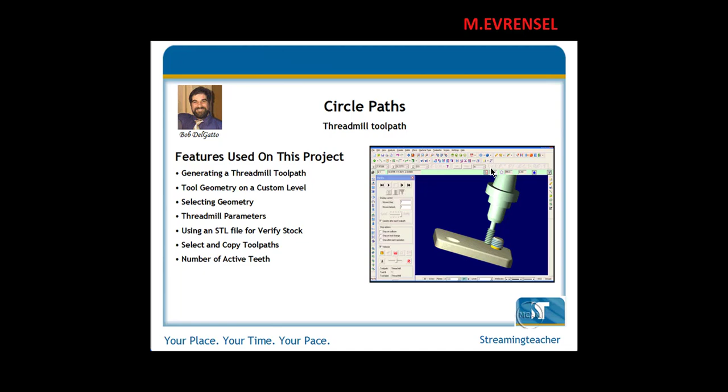This file is going to focus on creating a Threadmill toolpath. Now to access thread milling, we can go over here to our toolbar and click on this icon right over here, or from your toolpath button, come down to circle paths, over and down to Threadmill.

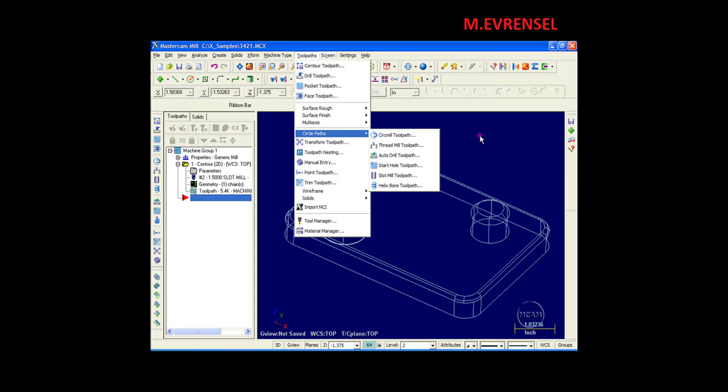But before we get started creating a toolpath, I'd like you to take a look and see what is included with this file. I'm going to open up my Levels Manager, Alt-Z, turn on my wireframe. Currently all that's on the screen is a solid. Right-click Dynamic Rotation, pick right over here, and I can move this around.

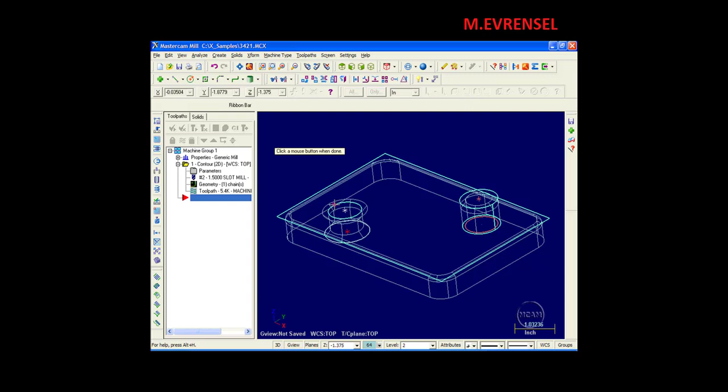Now, in addition to the solid, you'll see a few circles, points, and a rectangle. That wireframe geometry is what was used to create the solid. And as far as creating our Threadmill toolpaths, all we really need are the points. The red circle right in over here is used in the toolpath that comes with this file.

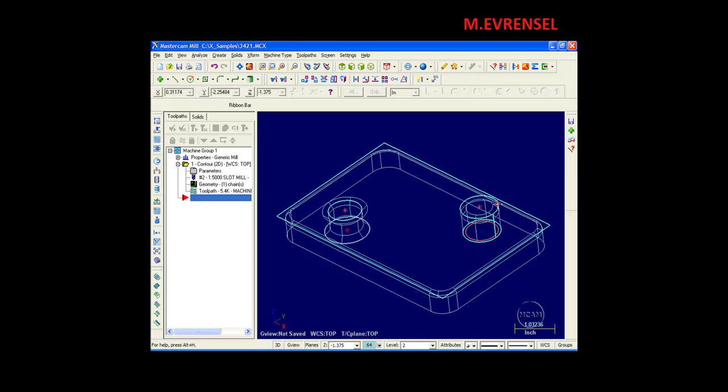And this is a contour with a slot mill that's going to come right around this standoff and cut a thread relief before we cut our threads on it. We're going to take a look at creating both an internal Threadmill toolpath and an external Threadmill toolpath.

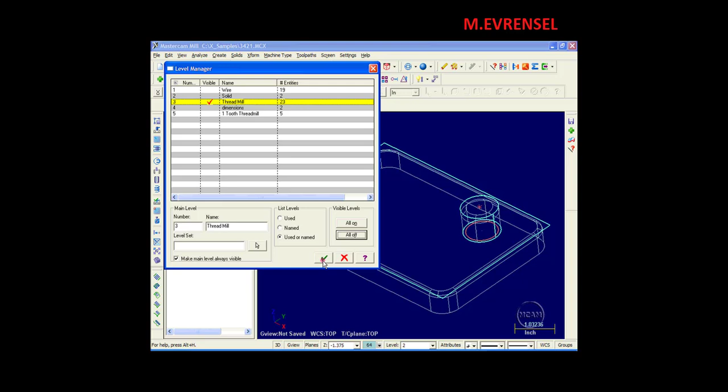The next thing I'd like you to look at, Alt-Z again, turn on Level 3 and all off for the rest. Now this should stay checked and highlighted yellow as long as you have this box checked. Click this off, go to Top View, Alt F1, Fit to Screen. Now what you're seeing here is my custom tool that I drew on Level 3. F9 gives me my axes indicator,

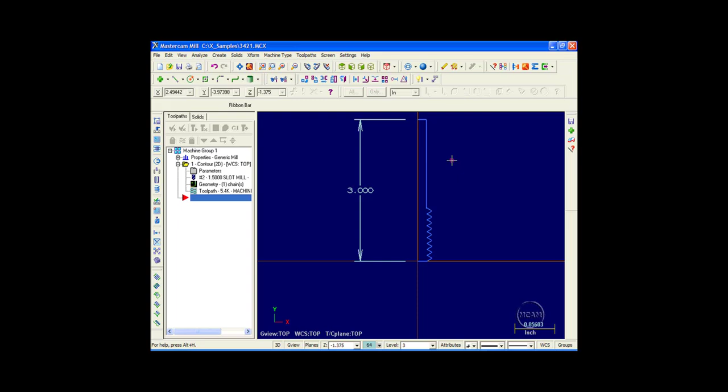X-axis, Y-axis, and what I've drawn here is an 8 threads per inch thread mill. I have 9 active teeth, and the pitch, the distance from one tooth to the next, is 1/8 of an inch. Now the way this is drawn, the bottom and center line of my tool starts at our origin, and I extended it up as high as I'd like it to be.

I do not connect these two endpoints together. I leave this as an open chain. So this is a multi-tooth thread mill. Alt-Z again. I could turn on dimensions and you could see my pitch. Here's my distance for active teeth, my overall length.

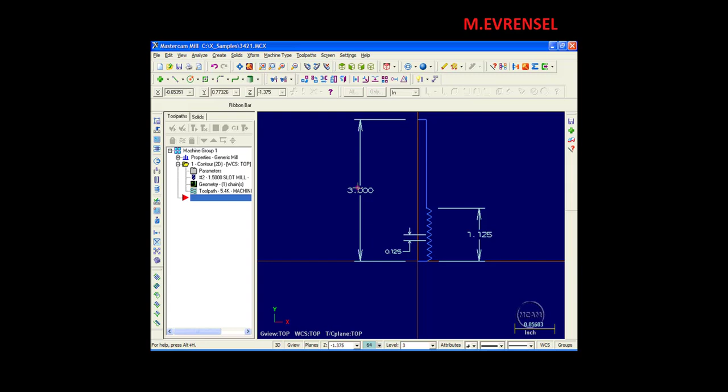Alt-Z again. Now I'm going to turn on Level 5 and turn these off. And what I have here is kind of like a boring bar, but it is shaped at my 60-degree angle. This can be used in a thread mill operation, but it only has one active tooth. If you don't have an actual thread mill, you can get away with using a boring bar that you've ground into the proper shape.

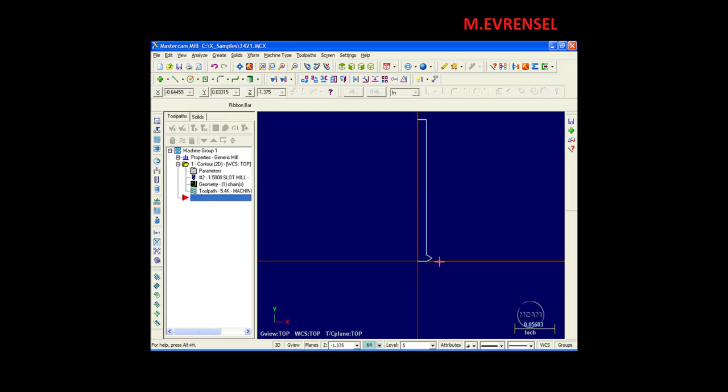Now what you're also going to find when I go to create these toolpaths, I have created undefined tools and I have pointed to the levels that I've drawn this geometry on. So my tool shape definitions are coming from these drawings. So we'll do 2 sets of toolpaths, one with the 9-tooth thread mill and one set of toolpaths with the single tooth thread mill. Let's go ahead and turn our wireframe back on.

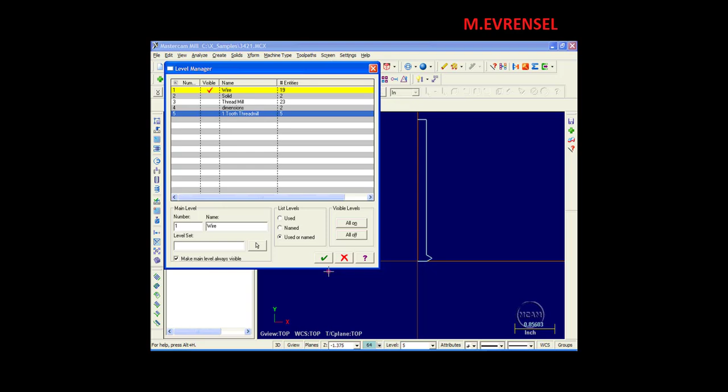I'll turn this off. Also turn our solid back on so you can see it. Alt-7 gives us our isometric view. Let's go ahead and activate our Threadmill toolpath. This opens the same dialog box as for drilling operations, where we can pick entities, which would be our circles, or we can pick points.

The first thing I'd like to do is pick the top point right over here, and we'll do our external thread first. I'll say OK, and I have our first tool. What I'm going to do is enter this by right-clicking and edit the tool, to show you what I have. Now with this tool, I have it pointing to custom level 3, so that's where the geometry for this multi-tooth thread mill is residing.

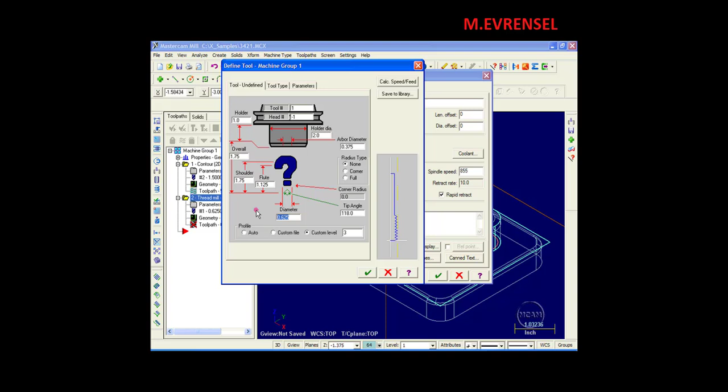I've specified the diameter so that it matches the geometry that I drew, and the value of this diameter is represented by this yellow vertical line right here. If I change this to 1 inch, look at what happens. And this is the value that Mastercam is going to be calculating the toolpath with. And if it doesn't match up with your geometry that you drew, you're not going to get satisfactory results.

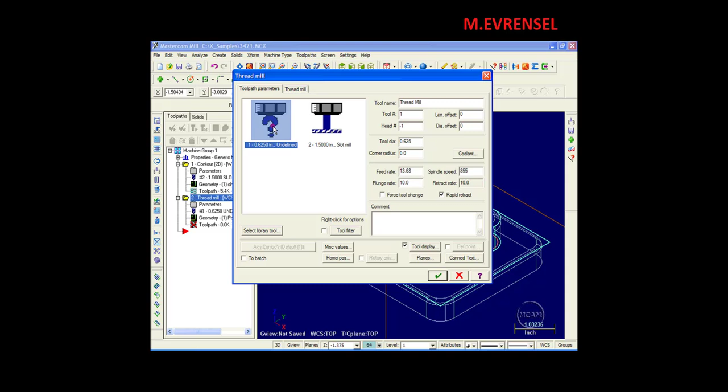I'll say OK. Now this is the tool that's selected. I can set my spindle speeds and feed rates. I can also come back here in the toolpath parameters and I could specify my feed rates that I would like to see happen. Let's move on to our Threadmill page. Number of active teeth.

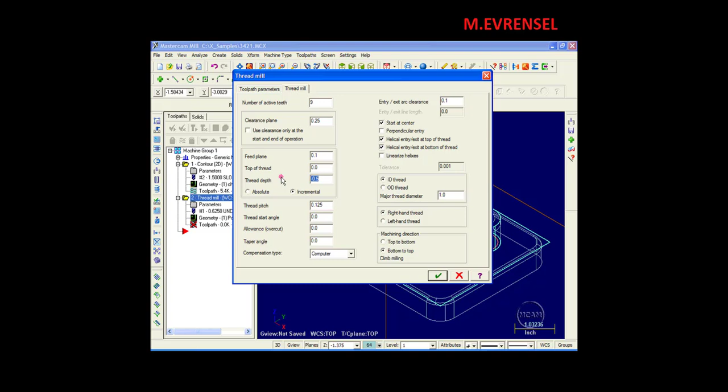Now in this tool we have 9 active teeth. We can set our clearance plane. Where do I want to rapid down to? I'll leave this at 1/4 of an inch. My feed plane, this will be fine. Top of thread is at 0. My thread depth is actually from the top up here down to this bottom circle is minus 750 thousandths.

Well, I'm going to be cutting a thread relief in here, so I don't want to take any chances of the tip of my tool touching the top of this surface. So I'm going to set this for minus 0.745. In this tool path, it can either be absolute or incremental. Since our point resides at 0 on the Cartesian coordinate system, the values would be the same.

My thread pitch is 1/8 of an inch. Thread start angle is 0. Allowance: this allows you to increase or decrease the cut of your thread. Taper angle, if you're doing pipe threads, for example. Compensation type, whether you want it in computer, control, wear, reverse wear, or off. Entry, exit, arc clearances. Do you want to start at the center?

Perpendicular entry, helical entry and exit at the top of the thread, helical entry, exit at the bottom of the thread. Linearize helixes. If you have a machine that cannot execute helical moves, if you check this, it will create line segments within the tolerance that you specify here. Creates a very large code. If you have a machine that's able to execute helixes, then leave this unchecked.

This is an OD thread. Our minor diameter is 0.865. It's a right-hand thread. We're going to go from top to bottom, performing a climb milling operation. I'll say OK. We'll activate backplot. Move this around a little bit, and let's take a peek.

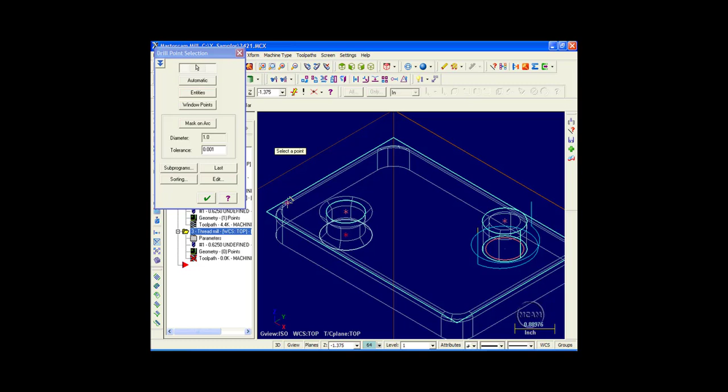Okay, let's go ahead and do our internal thread now. I'll activate our thread mill. I'm going to select our top point, click OK. I'm going to use the same tool. Go to my thread milling parameter pages, 9 active teeth, clearance plane is fine, feed plane, that's okay. My top of thread in actuality starts at negative 0.750. My thread depth, if I go absolute, is going to be minus 1.375.

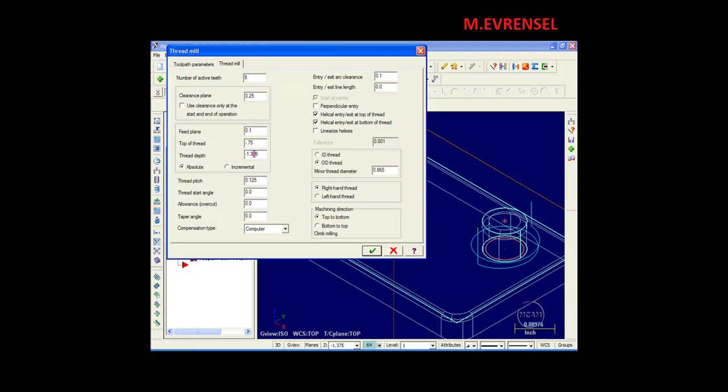Now, since this is a through hole, and I'm going to assume that I have clearances underneath, I'm going to increase this a little bit more just to give myself a little bit of latitude. So I'm going to give it 1 extra thread depth. So we'll put it at negative 1.5 inches. This is absolute. Now, if this was incremental, I would change this to where it would be a distance from the point that I chose, which would be negative 0.750. So I can go either way. So absolute, I'm going to leave it at negative 1.5.

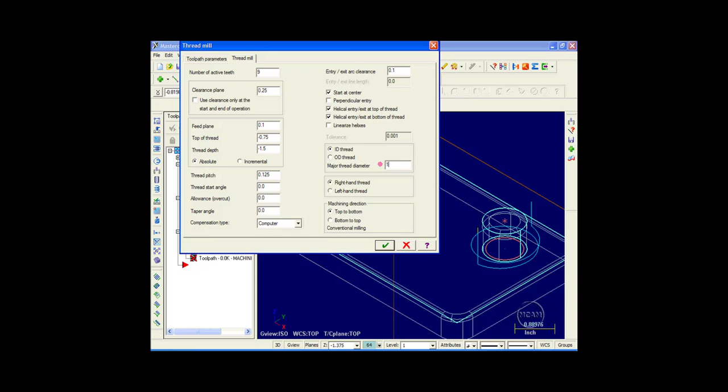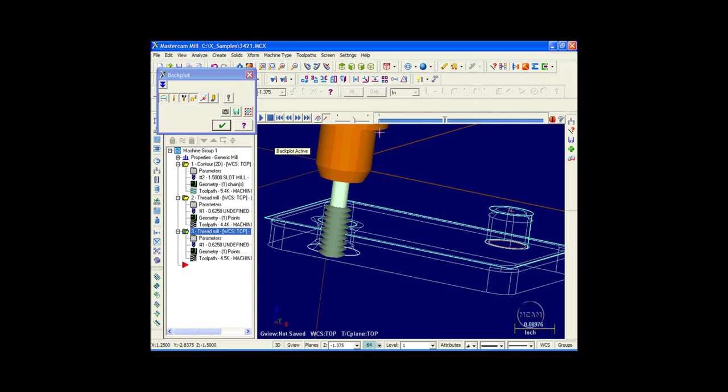Thread pitch is the same. Start angle, allowance, and so on is all the same. It's an ID thread. My major diameter on this one is 1 inch. It's a right-hand thread. And if I do a machining direction of top to bottom, that's conventional milling. If I have it enter the hole and go from bottom to top, that becomes climb milling. And this would be the preferred method that I would use. I'll click OK. We'll go to backplot. Our tool comes down and helixes up and then out.

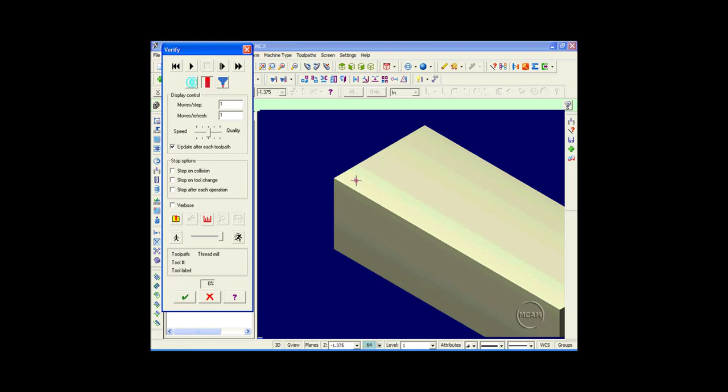Now, if you would like to see this whole operation, let's go to verify, and I'll show you what you can do. We'll select the machine group. I'm going to go to my isometric view. Let's enter verify. Since we haven't machined all of the rest of this part, what I've done is supplied you with an STL file so you can bring in a pre-shaped part.

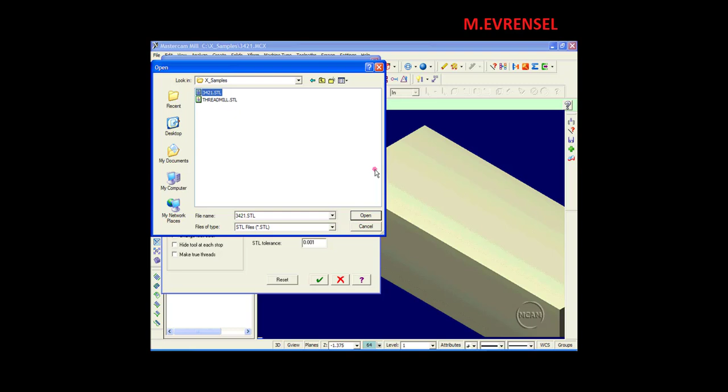So let's go into our configure page. We're going to switch our stock from box to file. Now, along with this file, one of the files that you were able to download would have been 3421.stl. So wherever you have saved that, go find it and highlight it, say open. Let's set our tool tolerances to 1,000th and our STL tolerances to 1,000th. Check on change tool color and we'll click OK.

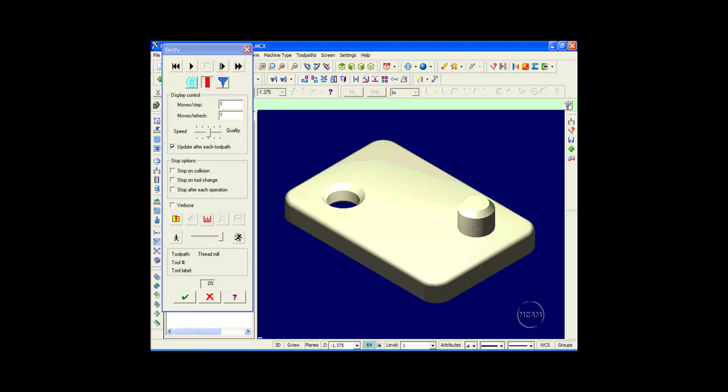And what you'll have now for your stock is a solid representation of the part prior to threading. Now, the first operation is going to be a slot mill that's going to come right around here and machine in a thread relief. So let's take a look at this. We're going to increase the quality. We're going to slow this down. I'll even have it show the tool holder. And let's go ahead and let it cut.

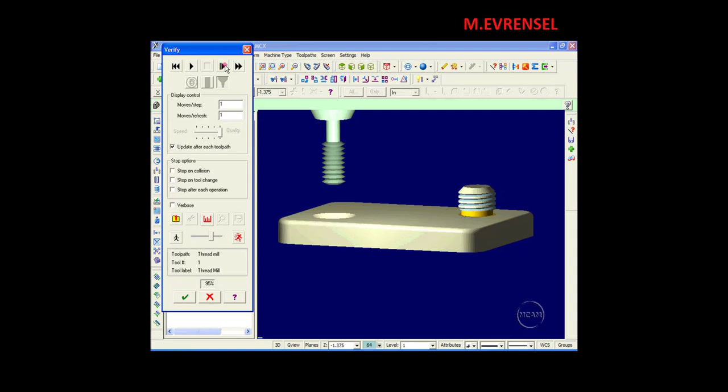Now there is our slot. And we'll stop right here. And you can see how it helixes down and comes out. Our next operation, we'll move over, down, this out, helix around, and exit our part. And you can see with the pre-cut chamfers and everything how it just funnels right on into our part. And we have our threads cut in.

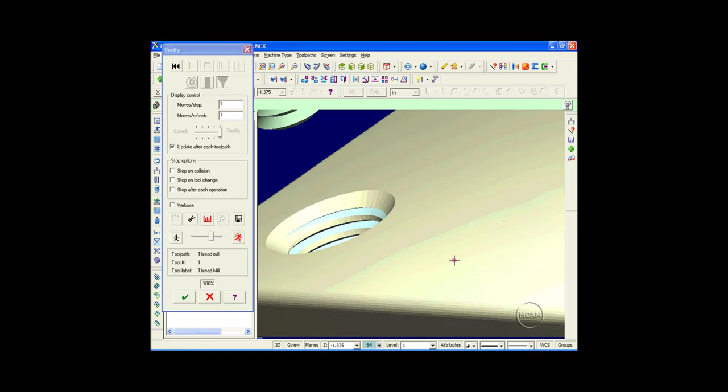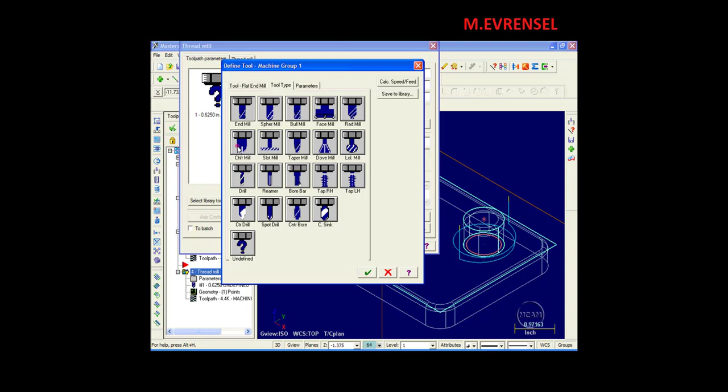Now let's do the same tool paths with our single tooth thread mill. So I'm going to right click on this, drag it down, release, tell it to copy after, go into my parameters, go to the front page of it, right click, create a new tool, undefined. My custom level is going to be level 5. Now you can see the outline of my single tooth thread mill, 0.625. I'll say OK.

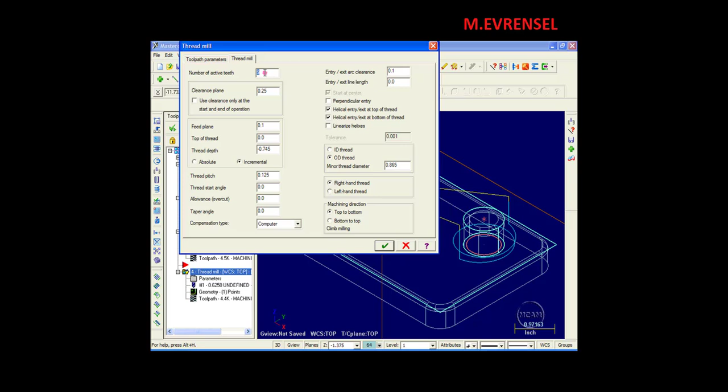Go to my thread mill parameters. Now for my number of active teeth, instead of 9 I'm going to say 1. Okay, this is an OD thread. Everything else stays the same. I'll accept it, regenerate it. Let's go ahead and go into backplot. And what you'll see now is our tool comes down and it helixes down as many times necessary to get the amount of thread that we need with only a single active cutting tooth.

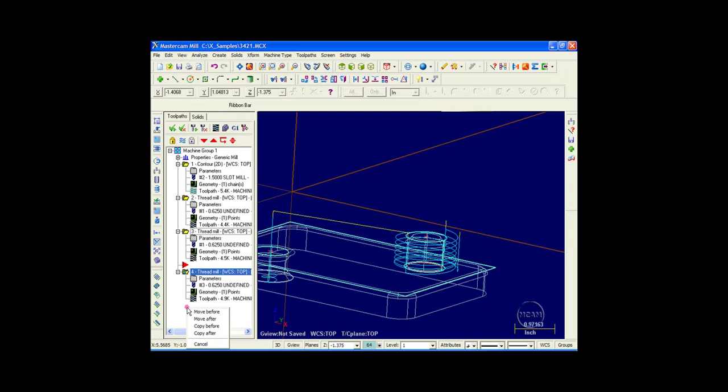Now we can do the same thing for our internal thread as well. I'll right click, drag that one down, copy after. We'll go into our parameters, go to our front page, and we will select our tool number 3. Go to Threadmill, and now instead of 9 active teeth we have 1. Everything else is the same. I'll accept it and regenerate it.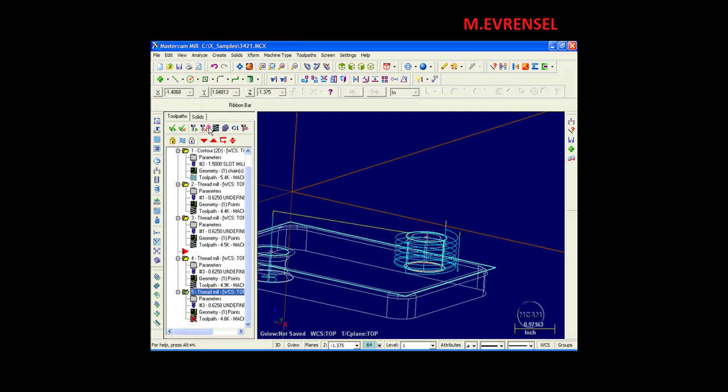And with this tool, it'll enter down in the bottom and then work its way up. And it will helix as many times as necessary to give us the amount of thread that we want with only 1 active tooth.

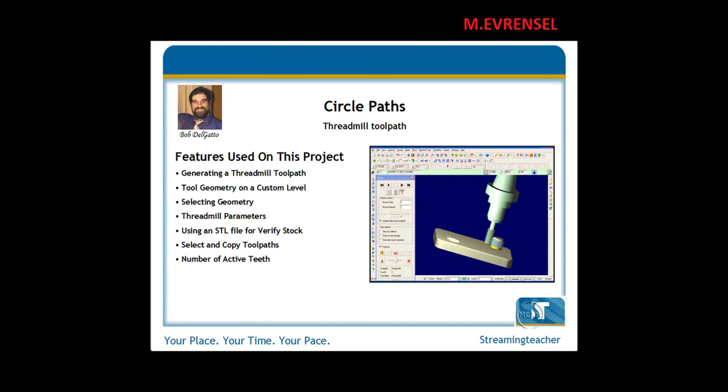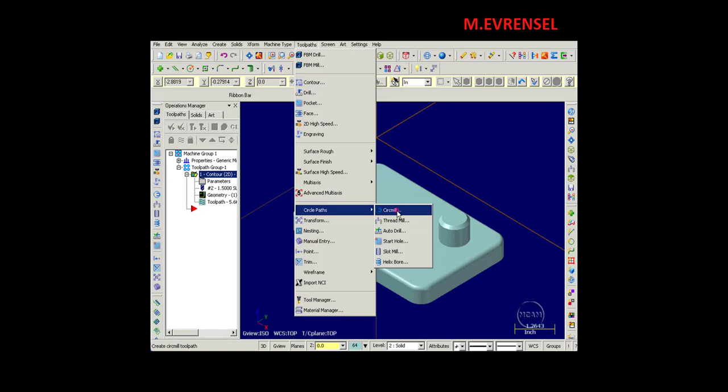In this video we're going to take a look at thread milling. Now thread milling is another toolpath within the circle mill family of toolpaths, and to access it you can get to it from the toolbar right up over here. You can go up into your main menu bar and under toolpaths, down to circle paths, over and down to thread mill. I could also right click in my operations manager, mill toolpaths, drop down to circle toolpaths, over to thread mill. Now before we get into doing that, I want to take a quick look at what is included in this file.

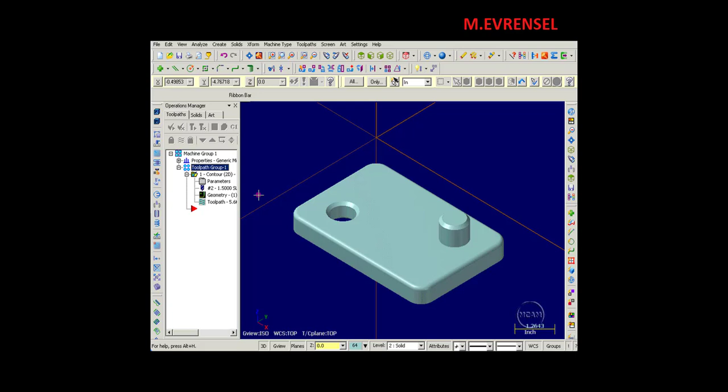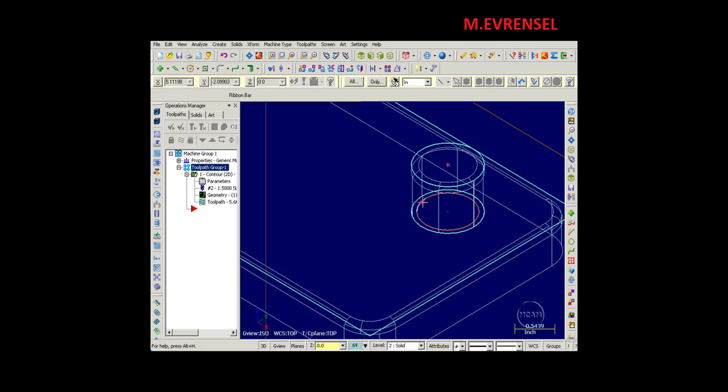Alt-Z opens up my levels manager, and currently level number 2 is my main level. I'm going to make level 1 visible. Click OK. Alt-S unshades my part. So there's the solid part that's on there, and then you'll see some wireframe. Now the wireframe for the most part is what was used to create the solid. There's a couple other elements up there though. I've got some points which I'm going to utilize to create the tool paths, and then this inner circle right here is being used in a tool path which is already created for a slitting saw to undercut this boss that's sticking up to act as a thread relief.

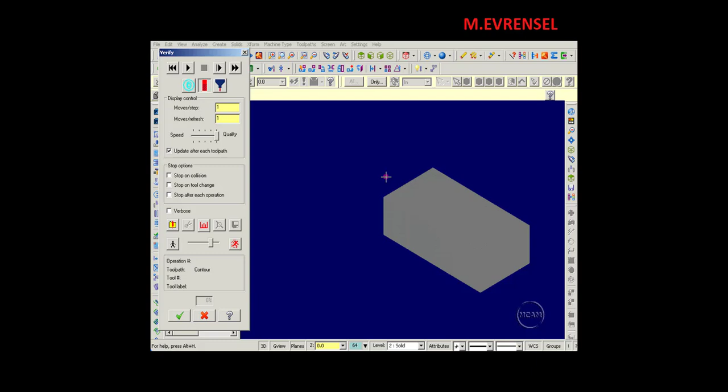So let's go ahead and take a look at this tool path and verify. Go into verify. Now I'm just getting a block of material here. What I want to do is I'm going to use the solid that's on the screen. So I'm going to go into my options. For my stock shape I'm going to select solid and click on my selection button. Alt-S shades my part. I'm going to come over here and I'm going to select my solid. Click OK. And now I've got my solid part representing the stock.

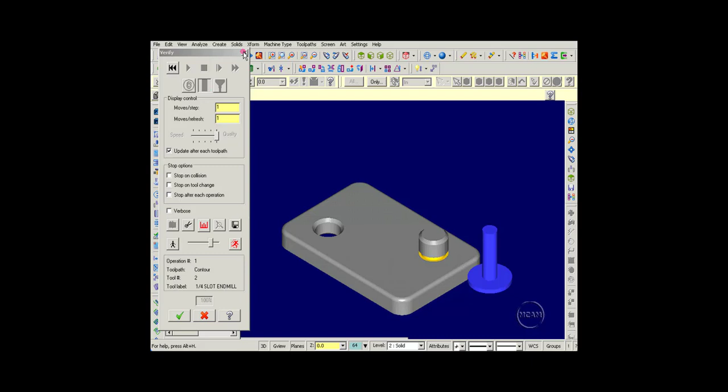Keep my quality up, turn the speed down a little bit, and let's go ahead and machine this. And you'll see a slitting saw come in and undercut the post that's sticking up, and this will be my thread relief. Isometric view, exit. I'm going to go back into my levels manager, Alt-Z. I'm going to make level 3 my main level and turn off the visibility on level 2 and level 1. Click OK. Alt-1 is my top view.

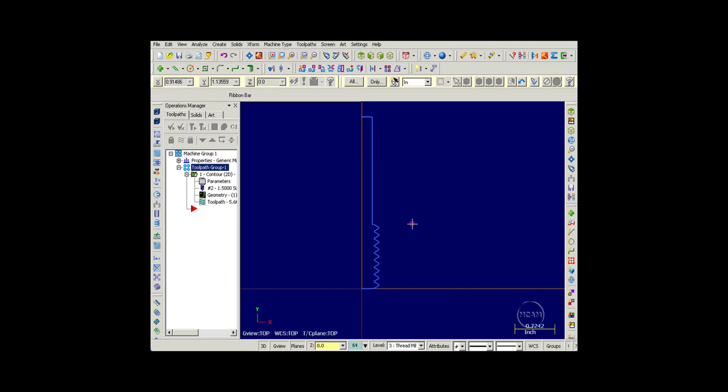Now what's residing on level 3 is the geometry that is going to define my thread milling tool. Alt-C. I'm going to go back to level 2 as my main level, turn off the visibility of level 3, turn my visibility of level 1 back on. Alt-7, isometric view. Alt-S turns the shading off.

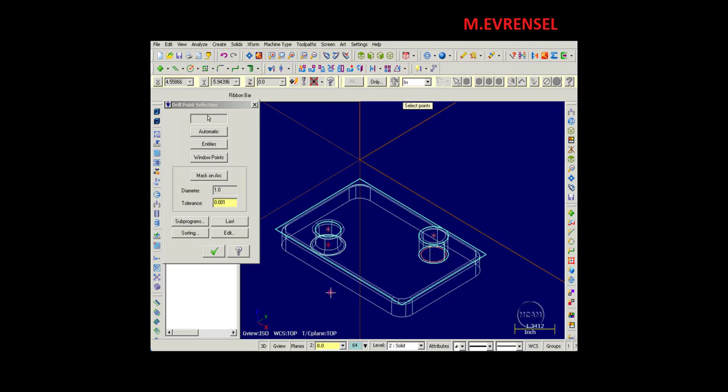I'm going to right-click in my Operations Manager, Mill Toolpaths, Circle Toolpaths, Threadmill. I'm going to zoom in, and I'm going to select this point. Click OK. If my operation is thread milling, I'm going to go to my tool page. I'm going to go into the white area of the window, right-click, and create new tool. Select Undefined, and for the profile, I'm going to toggle on Custom Level and type in Level 3, hit Enter.

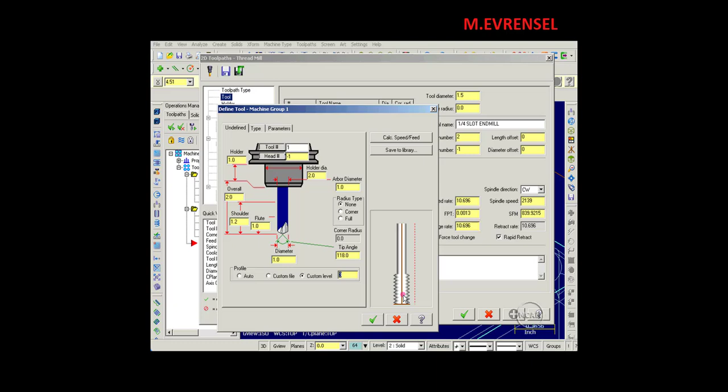Now you're going to see the profile representation of the geometry that is on Level 3. This dotted line right here is how the system is going to compensate for the diameter of the tool. It's defaulting to 1 inch, that's not what's drawn on there. What's actually drawn on there would represent a 0.625 diameter tool. And now you see this dotted line move to the edge of the tool.

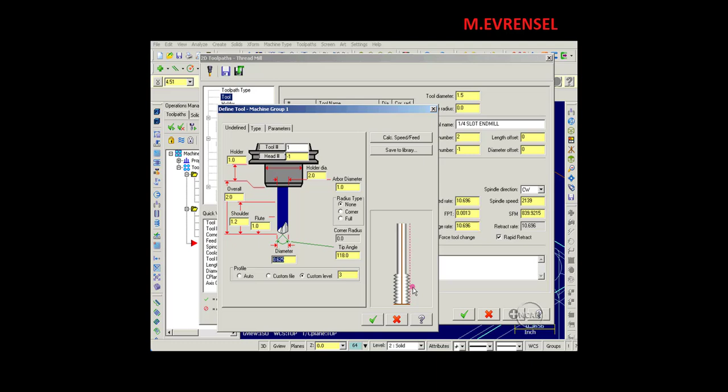Now the other thing that I'm going to do is go to my parameters page on this, and for the tool name I'm going to type in Threadmill. Spindle speed I'm going to select 1200 RPM. Retract rate, let's do 15 inches a minute. Plunge rate, let's do 12 inches a minute. And feed rate, let's put it in at 25 inches a minute. And click OK. Go to our cut parameters.

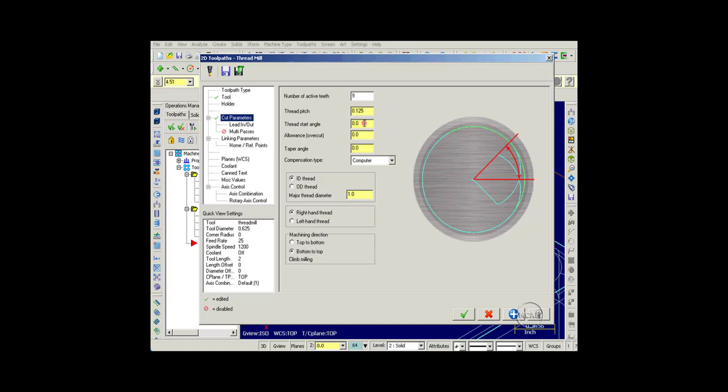Now the tool itself has 9 active teeth on it. My pitch is 0.125, so I can leave that where it's at. My thread starting angle, if I wanted to orient the beginning lead of this thread, I can define it here. I don't need to do that on this part. My allowance, this can give me the ability to adjust the size of the thread itself, depending upon whether it's an internal or external thread. Taper angle, if we were doing a pipe thread.

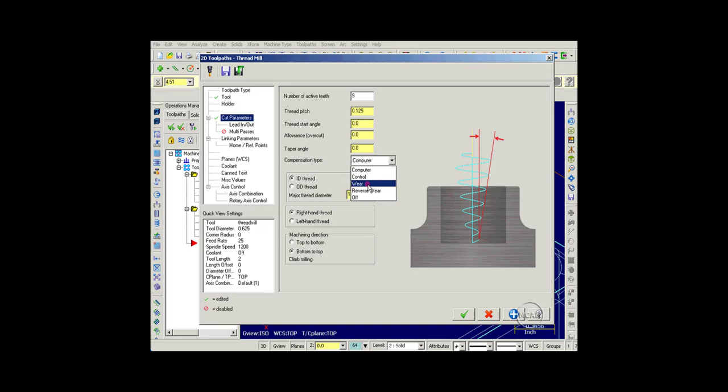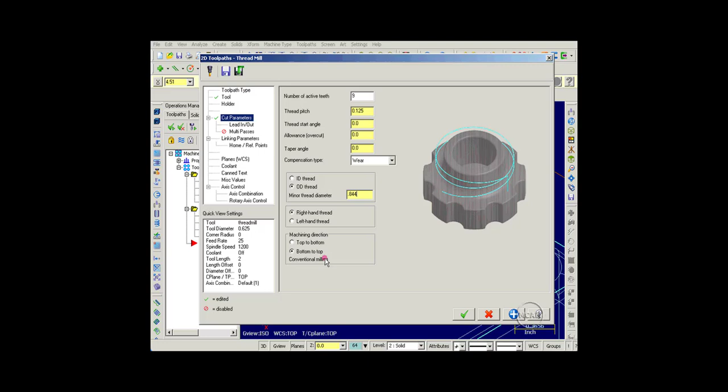Compensation type, computer, control, wear. I'm going to go ahead and select wear. Is this an ID thread or an OD thread? Okay, well, it's outside diameter. I need to tell it what the minor diameter is. On a 1"-8 thread, my minor diameter is 0.844. Right or left-hand thread? Well, this is a right-hand thread, and I want to climb mill it, so I'm going to go from top to bottom.

Continue to lead in, lead out. External thread, I've got plenty of room. I'm going to do 150 thousandths on that. I don't want to start at the center. I'm going to give it an extra line length, say 50 thousandths. I'll need that straight line move so that it could turn cutter comp on. Perpendicular entry, I don't need that. Helical entry at the top of threads, yes. At the bottom of the threads for the exit, yes.

Linearize helixes. This you would toggle on if you were dealing with a machine that couldn't process helical moves. By toggling this, you can define a tolerance and it'll start to create a whole series of linear moves for that type of machine to process. I can access multipass. I'll activate it. Let's give it 3 roughing passes of 0.035, 1 finish pass, and we'll make that 8 thousandths. I can specify spring passes if I desired. I can override the feed rate.

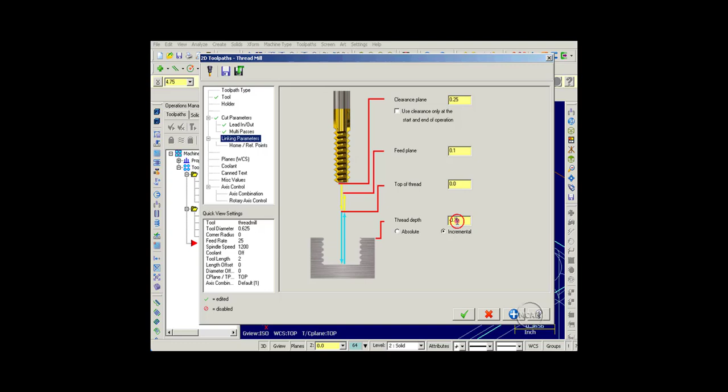My linking parameters. I'm going to right-click in this field for my thread depth, Z coordinate of a point. Brings me out to my graphics area, and I'm going to select the center of this arc. Now you see it automatically inputs a depth of -0.750. Now I don't want to take a chance of the tip of the tool touching the top face of my part. So I'm going to shorten this up just a little bit. I'm going to make it like 0.745.

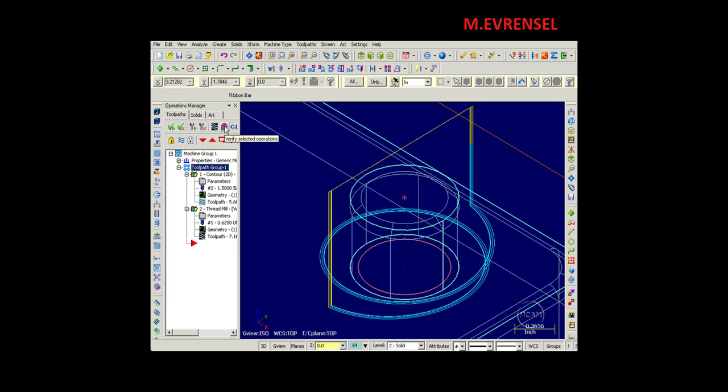The top of the thread is at 0. Feed plane, 100 thousandths above that. Clearance plane, let's make this 1/2 inch. I can turn on coolant and so on. I'm going to go ahead and accept this. I'm going to select both my operations and go into verify. We'll have it machine the thread relief and now the thread milling. And it's taking its multiple passes, getting deeper each time.

Right click, dynamic rotation. I'm going to pick the center of this and move it around. You'll see I've got the threads cut.

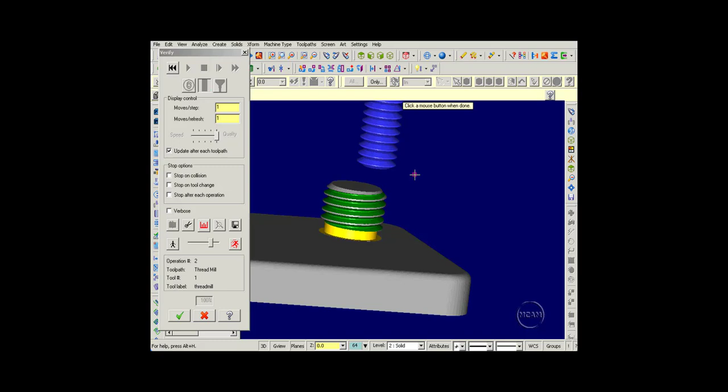Now we're going to create the internal Threadmill toolpath. Now I'm going to make sure that my second operation is the only one that is checked. I'm going to right-click, drag, release, copy after. Now I'm going to need to switch points because both of these operations are being generated by this point here.

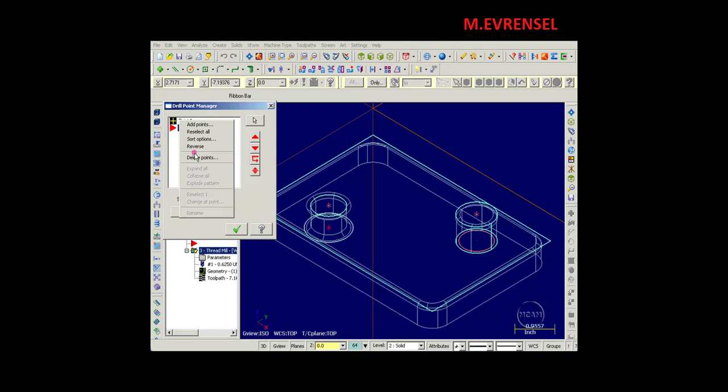Left-click on the geometry portion of my operation, and that'll bring me to my drill point manager. Right-click on the point in my manager, delete point, come to my graphics area and pick the point to delete. In the manager, right-click again, add a point, come to the graphics area. I'm going to select this point now, click OK, and click OK. Now let's go back into our parameters.

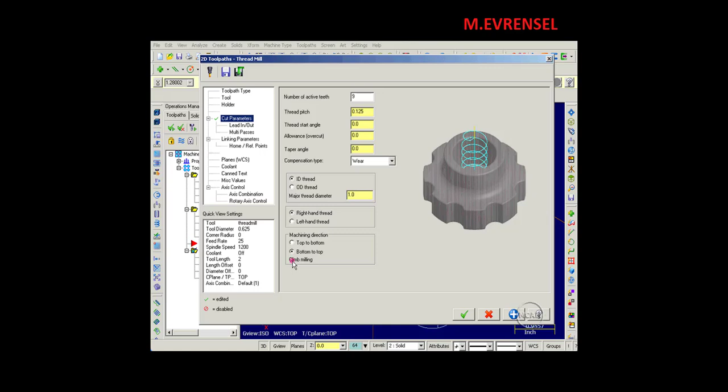My cutting tool is going to be the same. For the cut parameters, same information on top, with the exception that we're going for an ID thread now. And this will have a major diameter of 1 inch. Still a right-handed thread. I'm going to go from bottom to top so that it's climb milling. For the lead in, lead out, I'm going to get a little more conservative and change this to 100 thousandths.

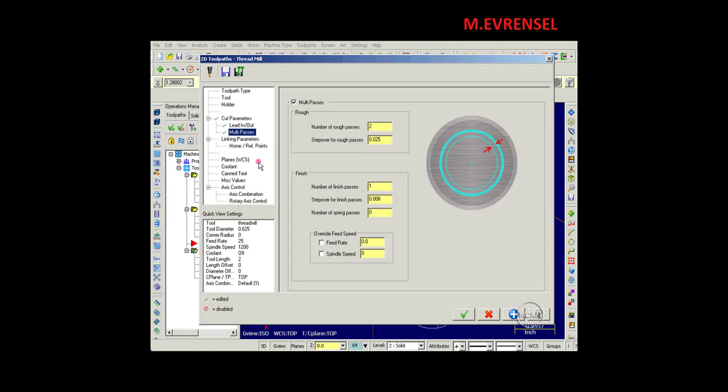Straight line, let's make this about 20 thousandths because I'll need that if I'm using cutter comp. Multi-passes, make this 2 at 25 thousandths. And we'll leave the finish pass the same. The linking parameters. Okay, I'm going to switch over to absolute.

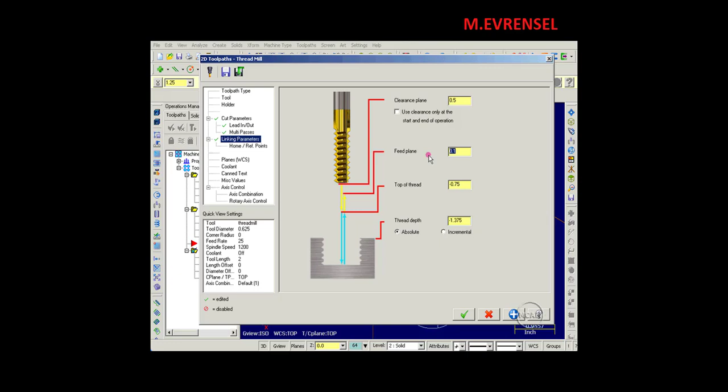Right-click, z-coordinate of a point, and I'm going to pick that point. Right-click in the top of thread field, z-coordinate of a point, pick this point. For my feed plane, I'm just going to type in a negative 0.5. And my clearance plane, I'll leave that as it stands. Click OK and regenerate. Now I'm going to go ahead and verify all of these.

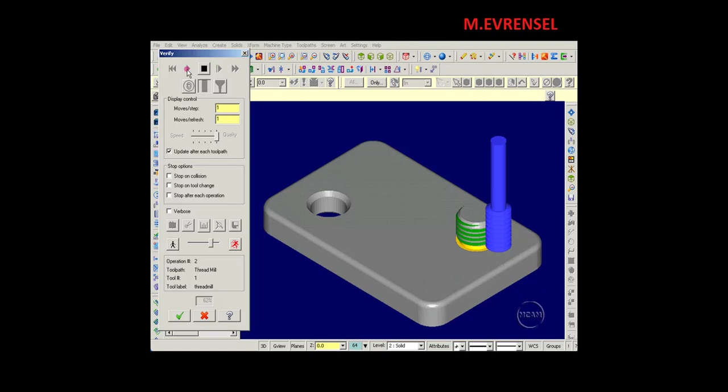Click on my toolpath group, go to verify, and let's see what we got. Does the undercut. Mills the threads on the outside. Should be the finish pass. Comes inside. And there we go. Now just to take a look at this, I'm going to go ahead and split my verify results. I'm going to click on this button.

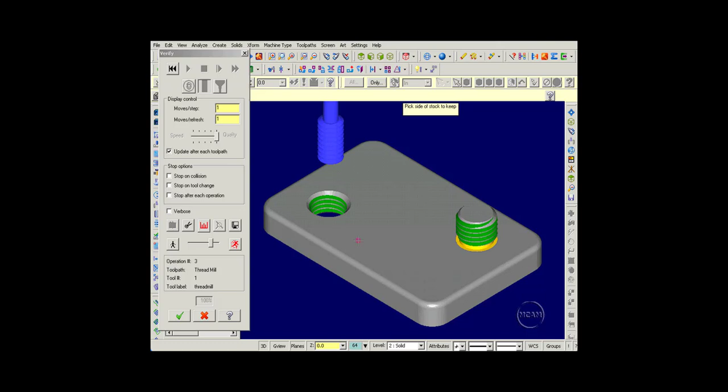I'm going to pick a spot that will act as a dividing line. I'm going to pick right over here and then come back behind it and select which side I want to keep. I could either be on this side or this side. I'm going to pick this. I'm going to right-click, dynamic rotation. I'm going to catch the center point of this circle and then just spin it around. And you'll see that we have internal threads now.

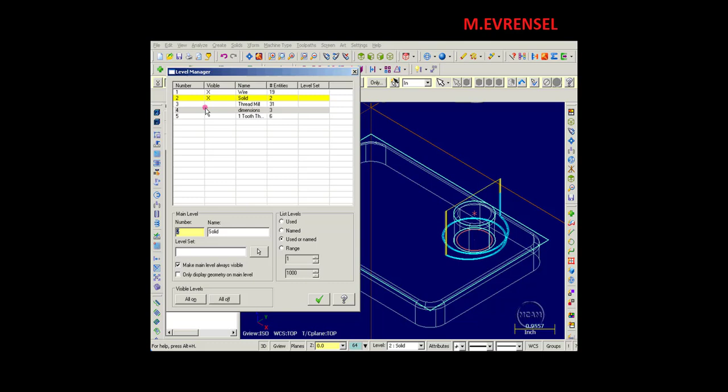I'm going to exit, Alt-7, isometric view, Alt-Z opens up my levels manager. Now on level 5, I'm going to turn off my toolpath visibility. Alt-1, top view. On level 5, I have the profile of another tool drawn.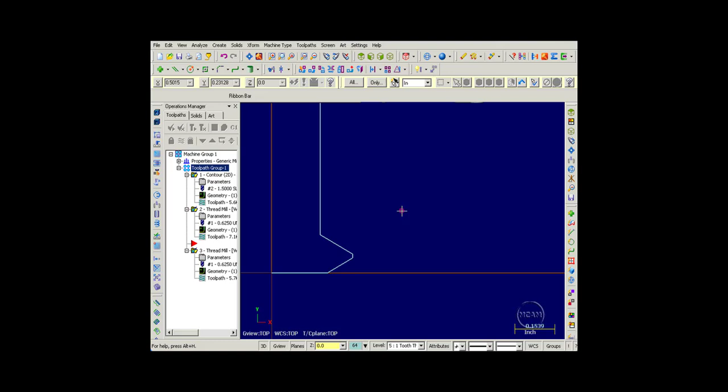Now this would be in the instance where you don't have a thread mill, but you've got a boring bar that you could regrind. And you can grind in your 60-degree included angle, put the flat at the tip of it, and draw it out. And you could thread mill using this. The only difference between the thread milling tool that I was using in these operations and what this would do is the number of active teeth. The previous one had 9 active teeth. This one only has 1.

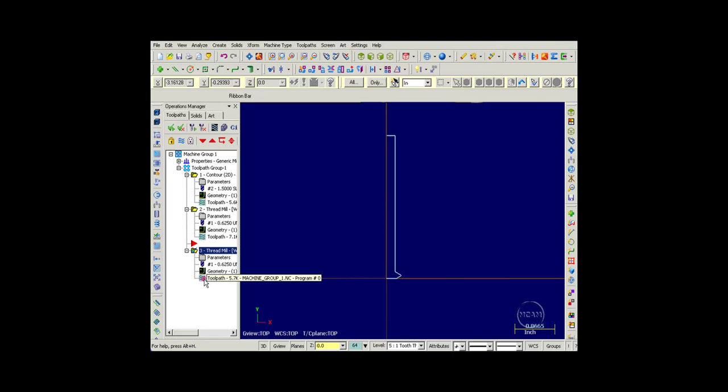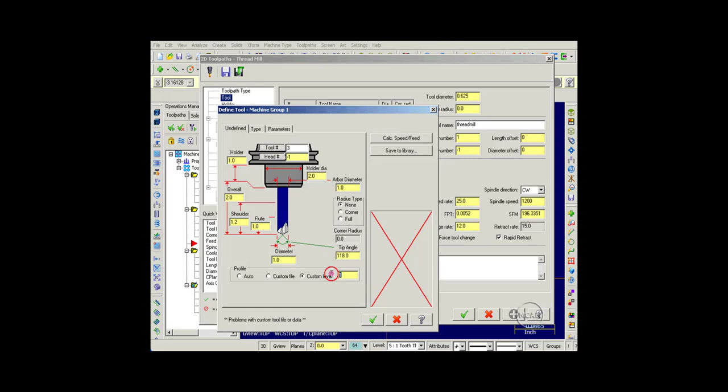So once again, I'm going to make sure that this operation is the only one that is checked. Right-click, drag, release, copy after. Go into my parameters. Go into my tool page. Right-click, create new tool. Undefined. Custom level. Level 5. And now you'll see the profile of this tool. The diameter is going to be the same, 0.625.

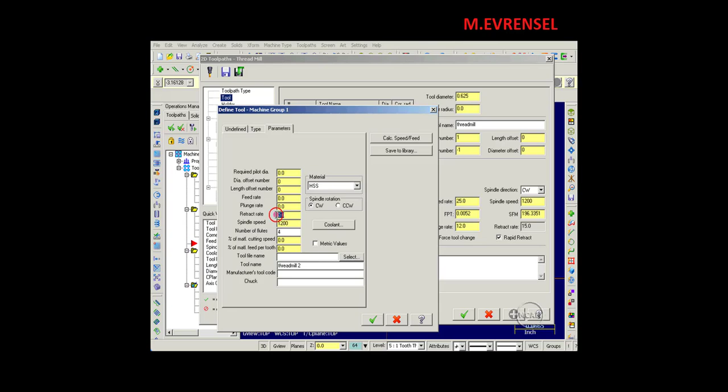In here, we're going to do the same thing. Threadmill 2. Spindle speed, we'll use 1200. Retract rate, 15. Plunge rate, 12. Feed rate, 25. Now it's telling me that there's a similar tool. I do want to add another one, so I'm going to say yes. Go into my cut parameters, active teeth, 1.

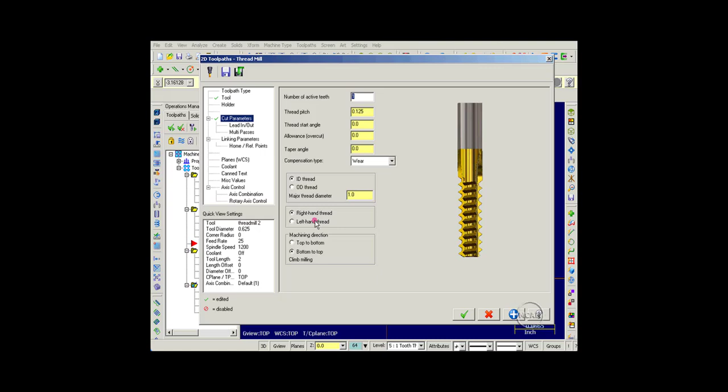The thread pitch, the same. ID thread, major diameter, right hand, bottom to top, lead in, lead out. All of this I'm going to keep the same. The only difference is my active number of teeth. Click OK. Alt-Z. I'm going to turn off level 5. Click OK.

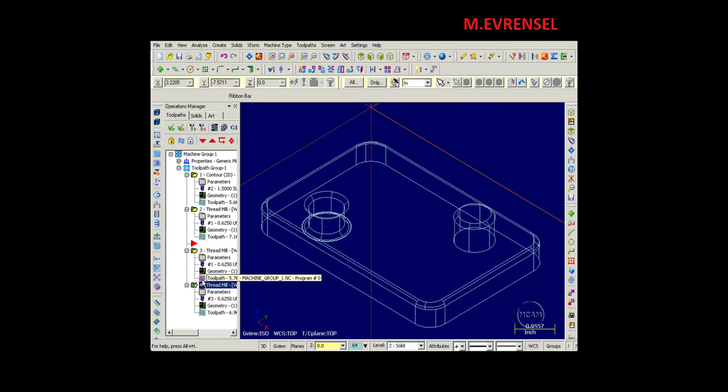Alt-7. Regenerate. And let's just do this one toolpath. Go to Verify. Comes down and works its way out. And there you have it.